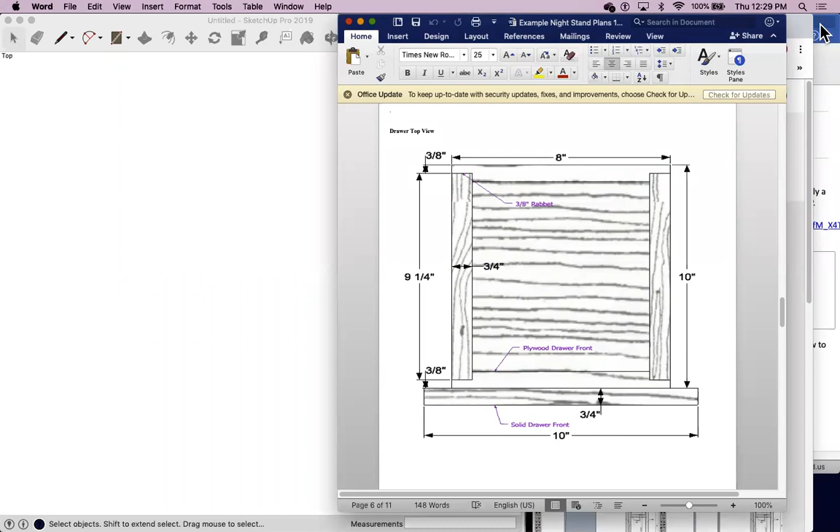All right, I'm going to show you today how to draw the drawer from the top view. So it's like we're looking straight down at the drawer to see how long the components of the drawer need to be. So we're going to just slide this example plan over a little bit, and we're going to scroll up to our top view because we need to know that size for the drawing.

So what we're going to do is we're going to use the dimensions from the top or the front view to be able to determine the length. So typically what needs to happen is the inside of the drawer, the box, needs to be 1 inch smaller than the opening exactly. If it's not, then what happens is the drawer slides will not work correctly, or they'll bind.

And so we're going to start by taking this size, 12 inches, minus an inch and a half. An inch and a half twice is 3 inches. So 12 minus 3 would be 9. 9 inches is how big this opening is. Okay, so we're going to take 9 inches, but now we have to subtract an inch. That leaves a ½ inch each side for the rollers. And so 9 minus 1 is going to be 8. So we're going to make this drawer 8 inches wide.

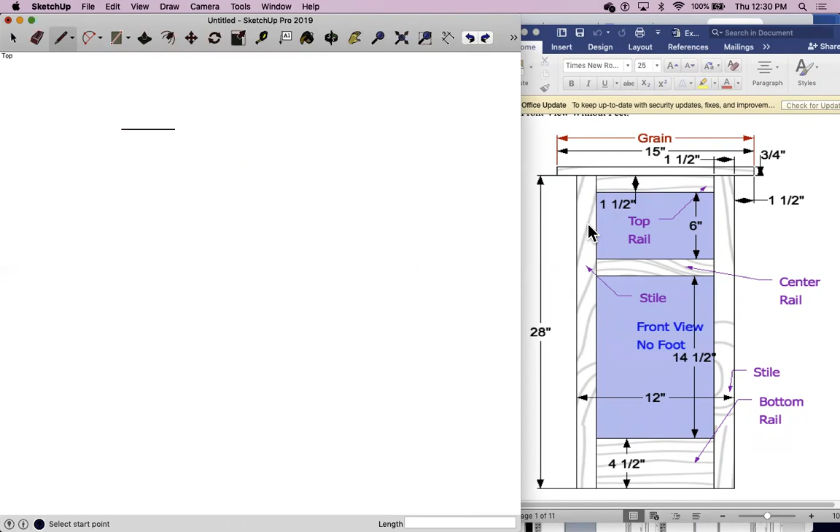So I'm going to come out here on SketchUp and I'm going to draw a line that's 8 inches wide. Then I'm going to come down here and look at my side view to show you how deep this project is. So with the face frame to the very back is 12 inches. Now you drew that groove for the backing to fit into on the inside side view, right? You've got your face frame, you've got your plywood, you've got the groove for the back.

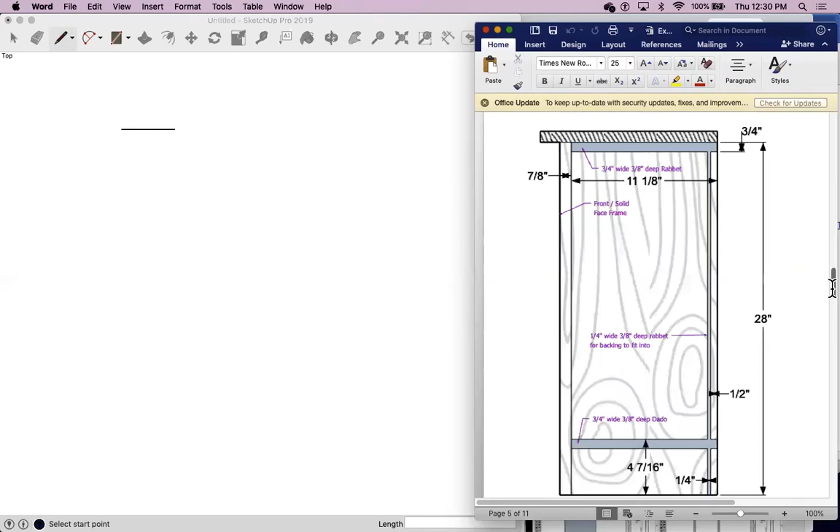We've got to make sure when we shut the drawer that the drawer does not hit the backing. So if our project's 12 inches deep from front to back, we're going to subtract 2 inches. That will give us enough room to safely build our project. So we're going to come in 10 inches from front to back, 2 inches shorter than the cabinet depth from front to back. We were 8 inches by 10 inches.

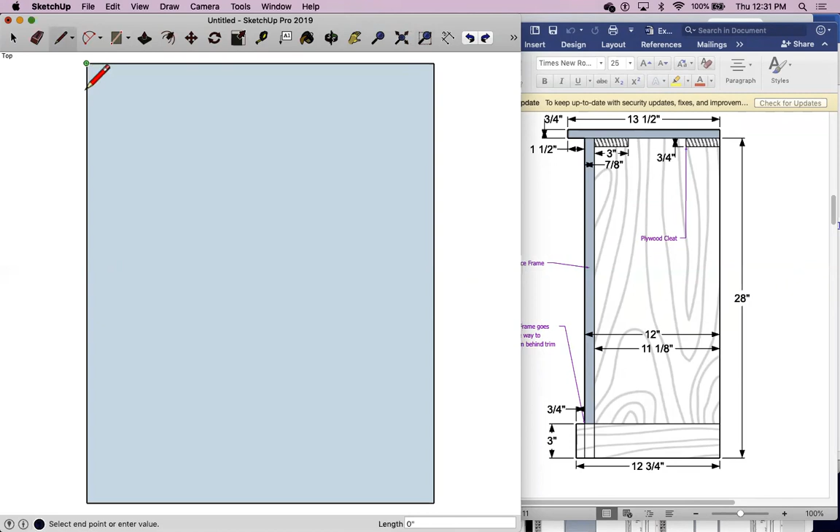So I'm going to zoom into this so we can see it a little closer. This would be our drawer. And now we've got to make this plywood box. And so we're going to come in 3/4 of an inch all the way around. So 3/4 down. Whoops. Find the right mark. And I'm going to come in 3/4. So I'm drawing that 3/4 all the way around and getting the size of my plywood drawn.

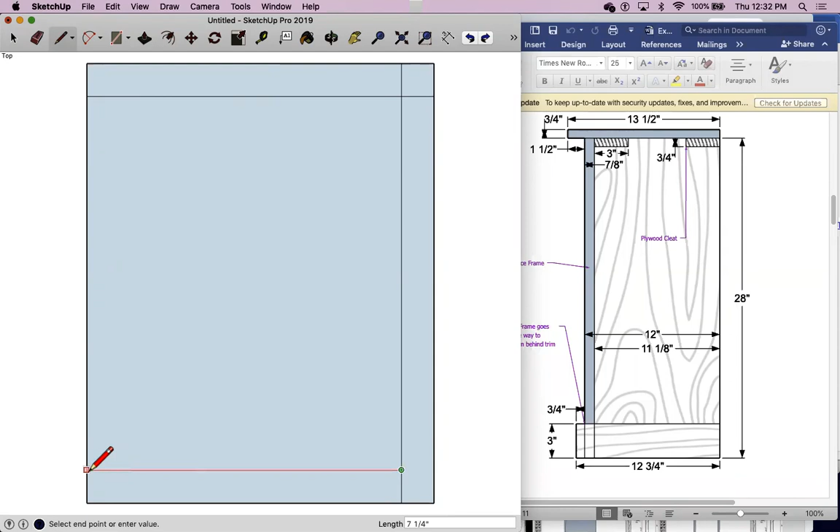We're using 3/4 plywood to build the project, and typically we're just building the drawer with leftover plywood from the excess sheet of plywood. That way we don't have to buy extra material or build it out of more solid lumber, things like that. The plywood from the sides and the bottom works just fine.

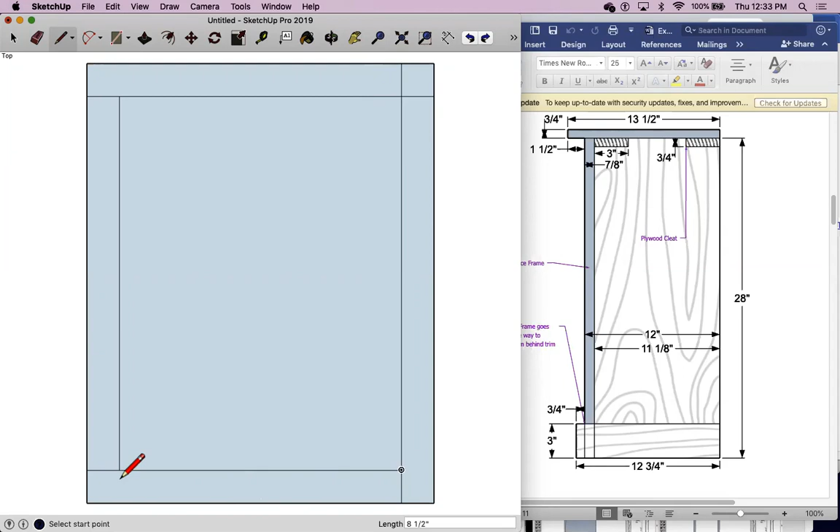So what I like to do is on the front of the cabinet, I like this to be my overall length. So I don't want to change this. So I'm going to draw the rabbets in there. Let me get back to that top view to show you. We've got rabbets on the front view right here. So there's some variability. If this was my front over here, then I would have to do some math and make sure that this is exactly the right size when we're done.

Right now, if we just cut this 1 inch smaller than the opening, we know it's not going to get any smaller or bigger, and then we can put our rabbets on there. So I like to put my rabbet on the front and the back of the drawing. So I'm going to come up here. I've got these straight lines going straight across, and we're going to just fill this in.

So typically, if we look here, we're going to come from the straight edge, we're going to come down 3/8 and back over 3/4, however you want to do that. So we're going to come down 3/8, and then I'm going to come over 3/4 of an inch, and I've created a rabbet right there. Now I'm going to erase this line right here, because that shows me that that's notched in.

So we're going to do the same to all these joints. We're going to come in 3/8 and over. And we're going to come in 3/8 and over and in 3/8 and over. And now all I got to do is come in and delete these lines that don't need to be there. That one and that one and that one. And oops, that's the one I wanted. That one and that one.

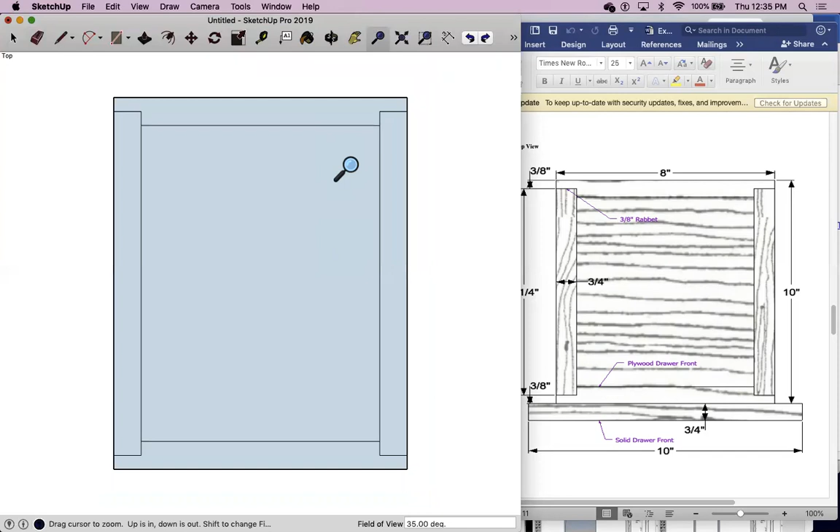So now we've got the front and the back. That should be our original 8 inches. Nothing has changed there. And we have our sides here. That should be overall 10 inches deep. Okay. Now the sides, the length of the sides should be 10 minus 3/8 and 3/8. 3/8 together twice is 3/4. So 10 minus 3/4 is 9 1/4.

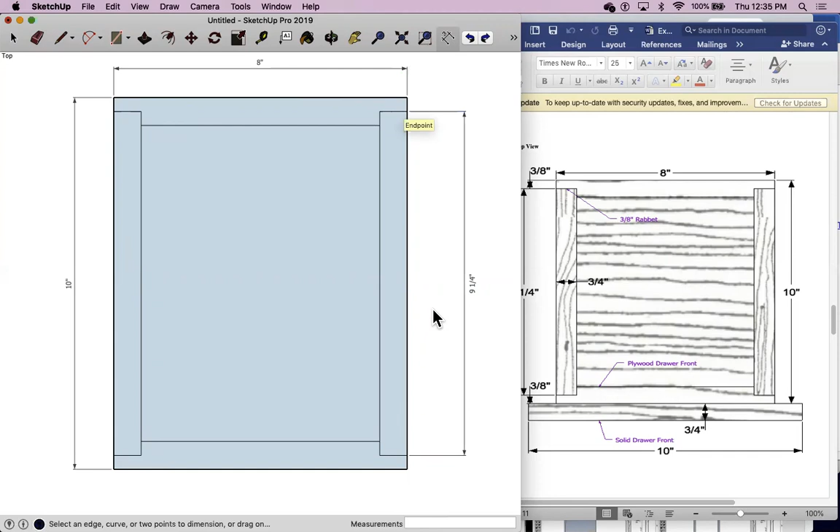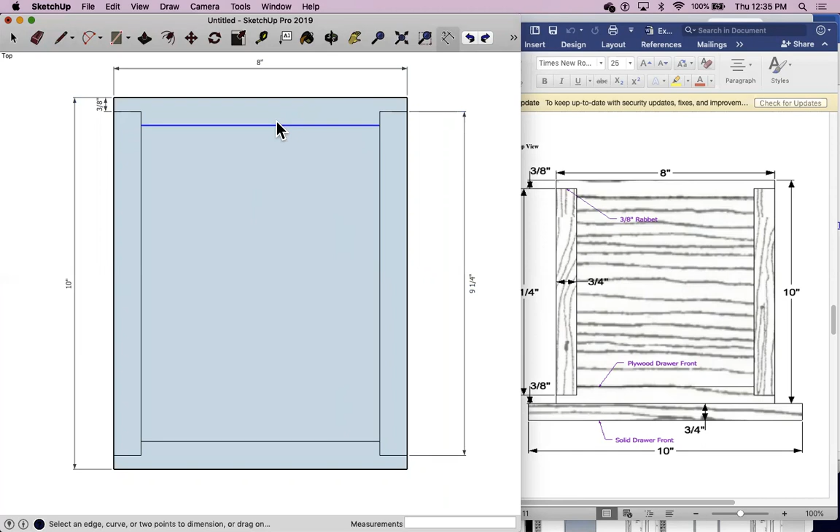That looks right. And just for some simplicity later on, it might be beneficial just to maybe dimension these so you know how big that rabbet is. The other thing we're going to see on the top view of the drawer is the solid drawer front. So the solid drawer front is typically 1 inch bigger than the opening. So if we get back to our front view, you can see here it's drawn at 10 inches wide, and our opening was 9 inches.

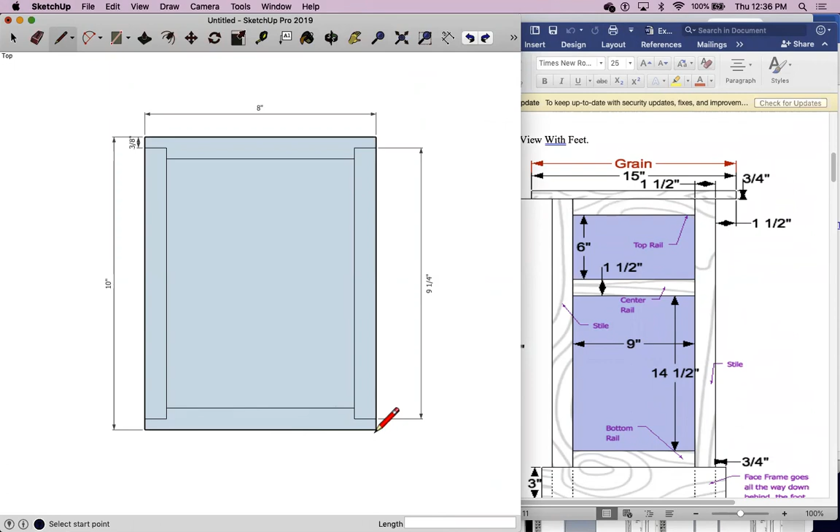So we come up here. If we take the opening of 9 inches, and we add an inch because it's going to overlay a 1/2 inch all the way around, that gives us an inch total. So we're going to take 9 plus an inch is 10. So that's 2 inches difference. So if we know that this is 8 and we need to draw 10, we're going to come off 1 inch off of each side. And it can be about 7/8 thick. And from the other side, we're going to come off 1 inch and up 7/8 and connect the dots.

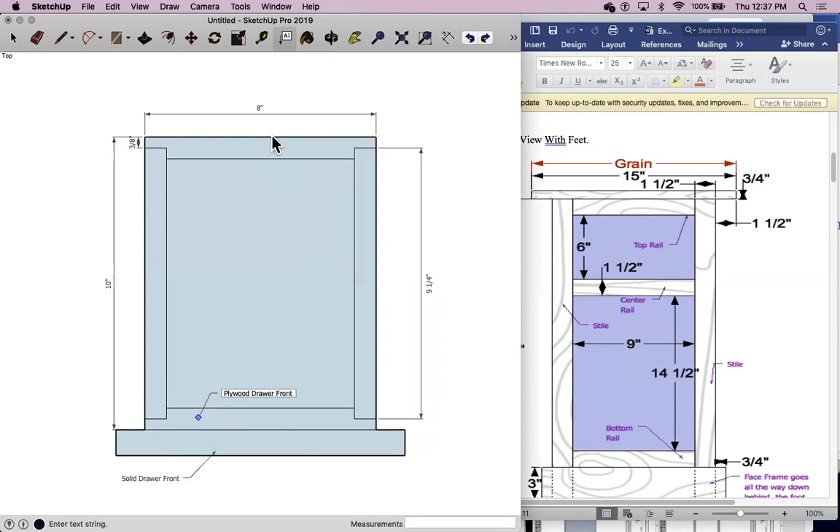So this would be our solid front, and we can label that. And this one, just so we are aware, there are 2 fronts. This is our plywood drawer front. Okay. And you don't really necessarily need to put wood grain on this because these would be plywood layers. It wouldn't be wood grain anyways. The only one that would really have wood grain would be the front, and that grain would run side to side. You don't have to put it on there, but if you want to, you can.

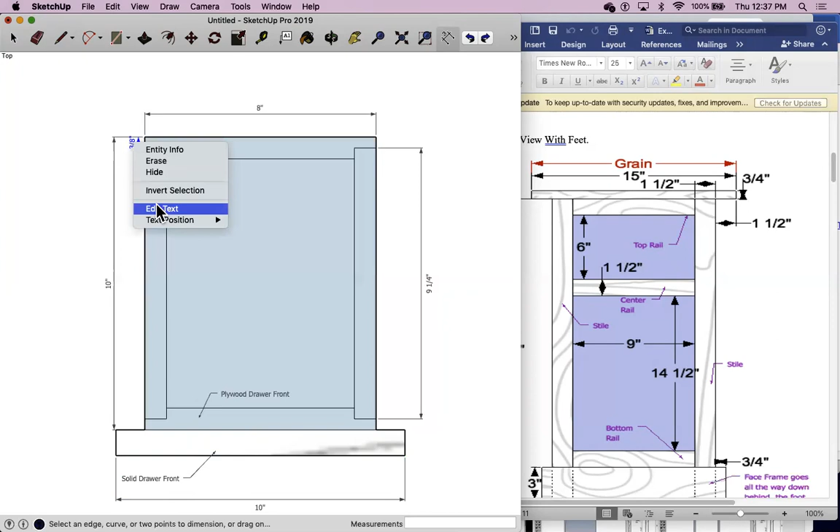You can see that there's not much grain because of the size of the pattern anyways and how narrow that board is. So for this, we would want to just then dimension this to make sure it is 1 inch bigger. I'm going to pull it down past this writing. I don't want any of my dimension lines cutting into each other. You see this one's cutting in, so we need to move this so that it pops it out so that it's very clear and precise of what we're doing.

Okay, hopefully this helps make the drawer drawing process easier for you.